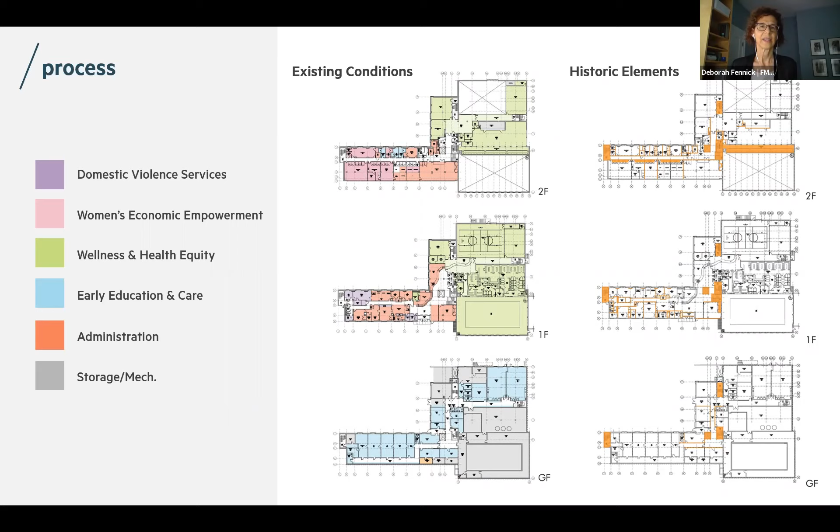So we developed several optional ways of organizing the facilities. Option 2A was the winner, where some of the key elements of this renovation in terms of layout were upgrading the early education facility, bringing it up to current standards. Also, one of the more significant moves within the building, expanding the domestic violence services so they could serve the whole region.

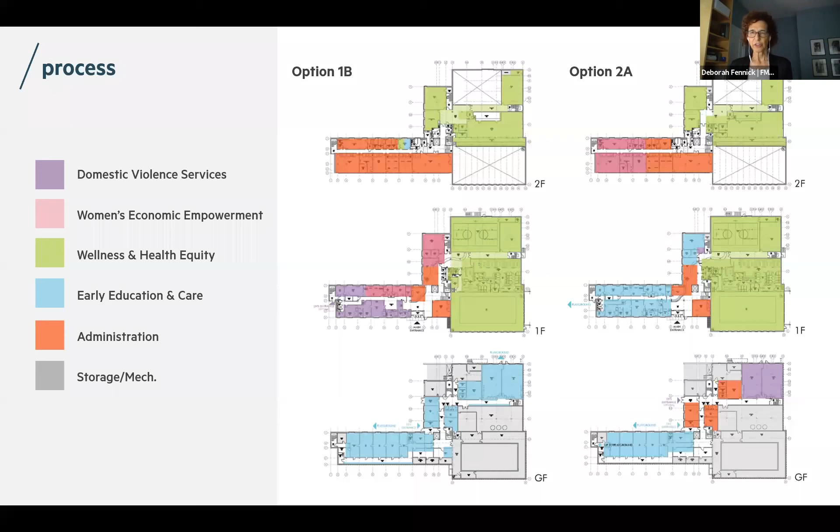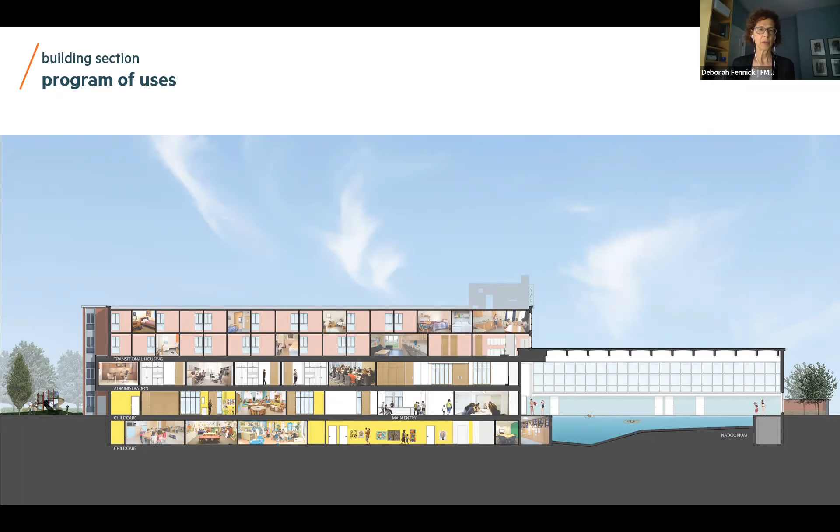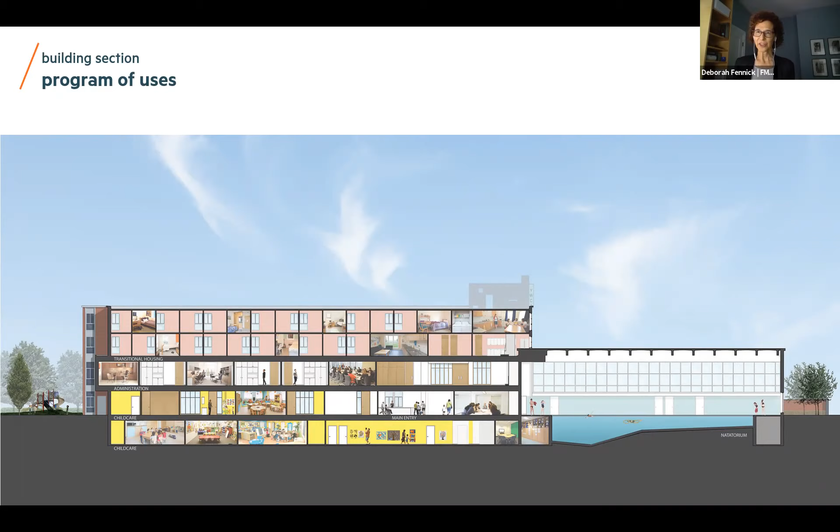And then just a general reorganization of the building to better serve their departments. Next slide. There's a diagram of the organization of the program in section with the housing, the transitional housing, the upper two levels. The middle level, which is brown here, is the administration, and then childcare in the front wing is on the first floor, and the ground floor has the athletic facilities, the pool caught in this section also.

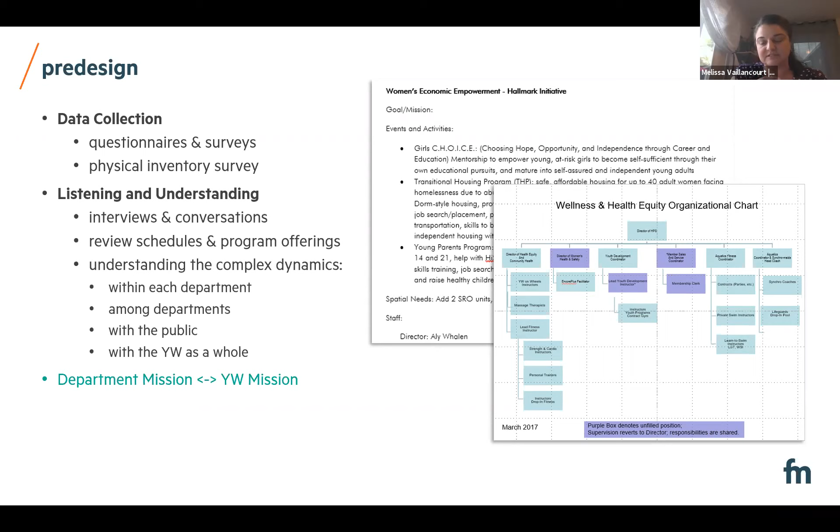So I'm going to go to the next slide and talk a little bit about the challenge that brings. There's a limited budget, there's limited square footage. We weren't adding on to this building at all. And there are a lot of requests and a lot of desires and a lot of dreams. So fortunately, we were able to look back at what Deborah mentioned, that strategy screen document, and use it as prioritization criteria.

So we could start to vet different requests and help the YW make some of these decisions that are really sometimes uncomfortable to make, because you may have demands from one department that might mean something gets sacrificed somewhere else. But together, I think we created this robust toolkit, whether it was data collection tools, understanding the weight of certain requirements, the necessity of certain requirements, or whether things were maybe just nice to have. So through this process, I think we actually created tools with the YW to help track and also help understand and make decisions.

Let's see, I'm going to go to the next slide. Another client of sorts worth mentioning is we had to answer to a lot of grant and funding sources as well. So although we had the YW as our primary client, the project came together because of this amazing network of funds and grants. And the folks over at Pinck & Company, the OPM, really led an amazing effort in pulling a lot of these grants together into the forefront.

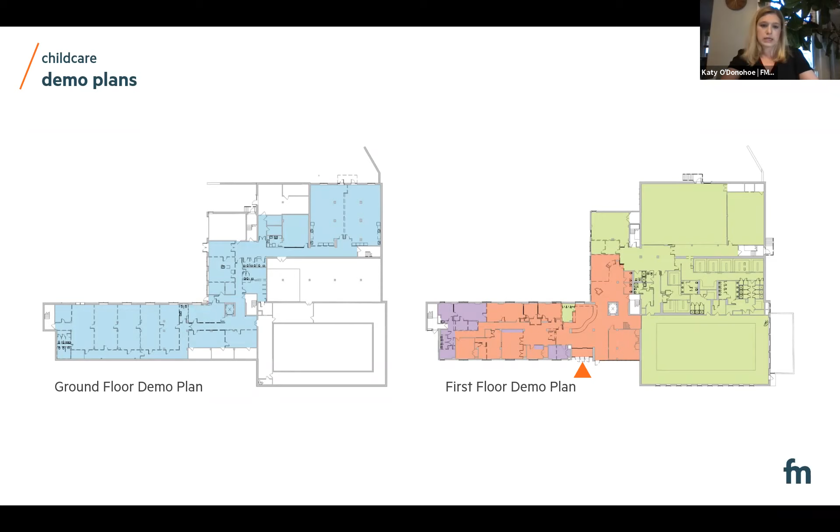One of the biggest changes programmatically throughout the building was shifting the childcare to two floors rather than one. It's organized so that the infant and toddler spaces are on the first floor just off the lobby, providing some supervision from the front desk.

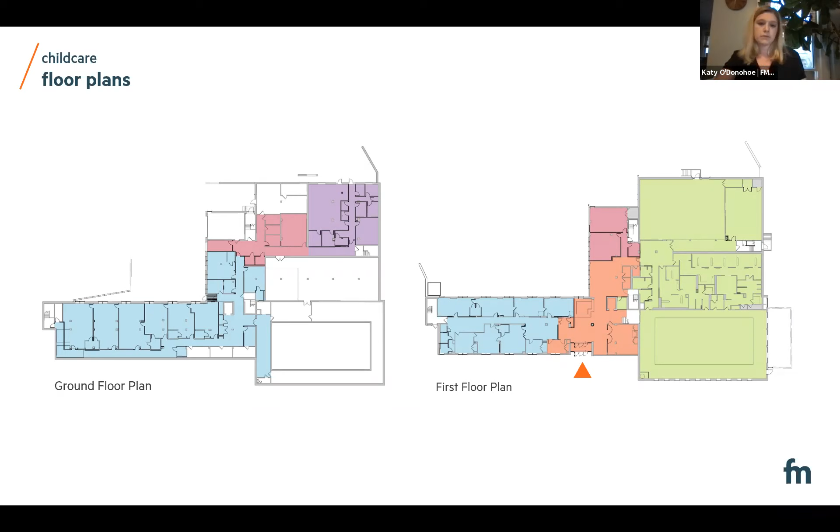The EEOST brought a lot of challenges and programmatic needs. The biggest one out of anything was actually plumbing.

One of the deal breakers in order to be a good contender for the grant was to have four sinks per classroom. That's two for children: one activity sink for crafts or hand washing, and one toileting sink associated with the bathroom. And then two for staff: an activity or food prep sink and a diapering sink, which have to be located physically separate from each other.

Of course, we had to have one per classroom that was also accessible, which took up a lot of square footage, and we had very limited real estate to deal with. It was a lot - a small amount of space to try and fit in a lot of fixtures and associated casework.

Our solution, particularly for the preschool and toddler spaces, was a Jack and Jill configuration. Based on occupancy for preschoolers, there are 10 to 20 kids per class, so we had two shared toilets between the classrooms that were accessible from both. In the kindergarten or pre-K, we were able to do one accessible toilet in the corner of each room, but they have these four-foot high walls, so there's always supervision.

In the shared toilets between the classrooms, we provided glass between the diapering area and the toilet itself to create some separation, though they are quite open otherwise. For the activity sinks, we did a trough sink that becomes a bit of a play feature for kids instead of typical sinks, as well as some casework for staff.

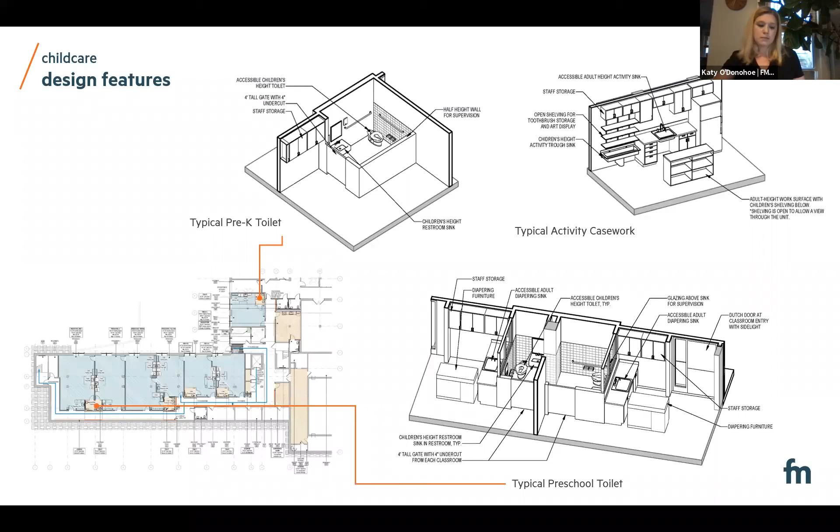For the playground, one of the biggest benefits of splitting them up on two floors was the ability to access the playgrounds directly from their classrooms.

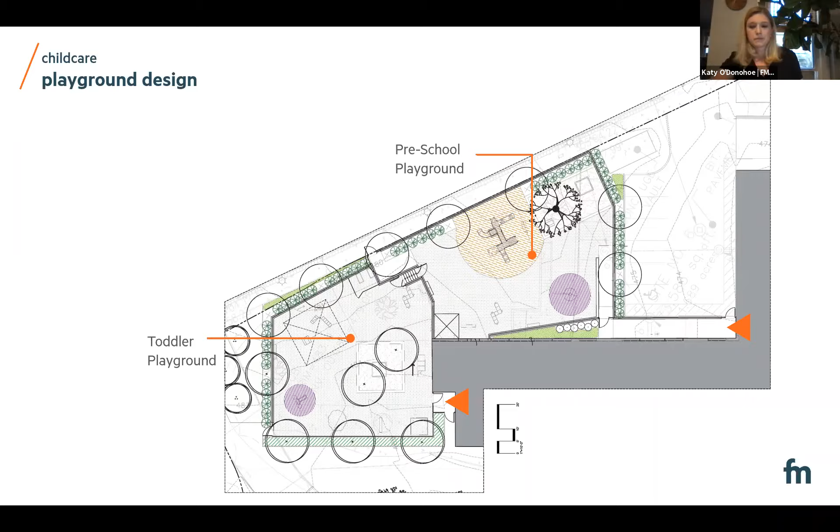Okay, so as we were going through design, two major things happened. The first is we were doing the programming and design and exploring the opportunities of redesign, constantly measuring these things against their strategic screen, the value to the organization and what they were trying to accomplish. The project went from essentially an upgrade of the 1961 building that had some renovations in the 80s, but just very strategic ones, to really rethinking the organization of the building. As Katy described, what happened to the childcare area was one of the more dramatic rethinkings of it.

And with that, the cost grew again. As things became priorities to the YW, they increased the budget. So it grew from like a $12 million to a $16 million project. They became a little more bullish about the capital campaign and their ability to make this work. So that was the first major thing that was happening through the design process.

The second is, again, their costs were based on non-union open shop trades participating in the project. Over time, they realized how important the unions were to enabling more diverse exposure to diverse groups, to minorities and to women, bringing them into the trades. So they wanted to pursue with this project, and pursue their CM procurement, with a union-aligned CM. That increased the budget from 16 million to 19, 20 million.

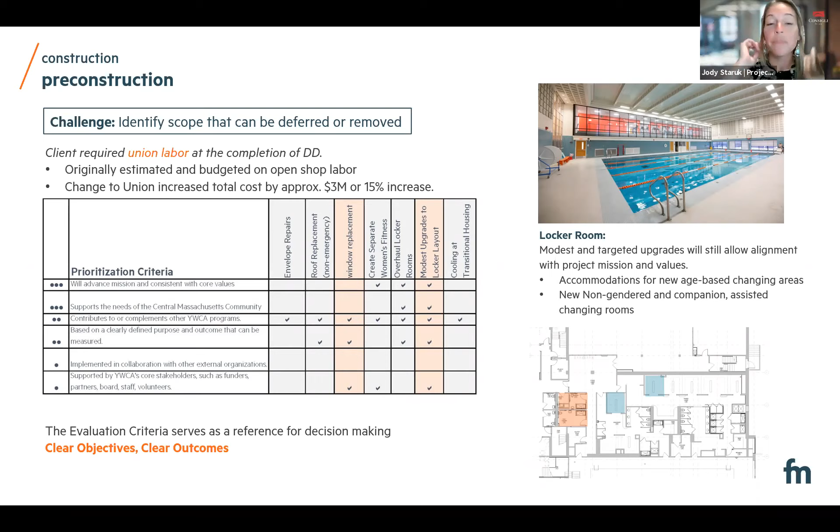And, you know, we bought those signs, the women working sign. I made sure I bought one so that I could have it in my garage, because everybody had that sense of pride, an opportunity in what this job was and what it represented for not only ourselves, but also the client. And we were really thrilled to be a part of it.

So with that, I want to make sure to turn it over to Janice and Andrea to give a few thoughts about living through the project in the field in the middle of the pandemic.

Thanks, Jody. I just wanted to really highlight the fact that as a women-led project team, construction management, and everything going on in the field at the time, we came in with a very unique perspective, being wives and mothers, sisters, that we could take into account the mission of the YW and the needs of the programming, particularly the childcare, in order to schedule the construction activities and the logistics of everything that had to be done to complete the project on time, and still manage to keep the client happy, make sure their programming needs were met, and essentially childcare really didn't get affected so much by the construction.

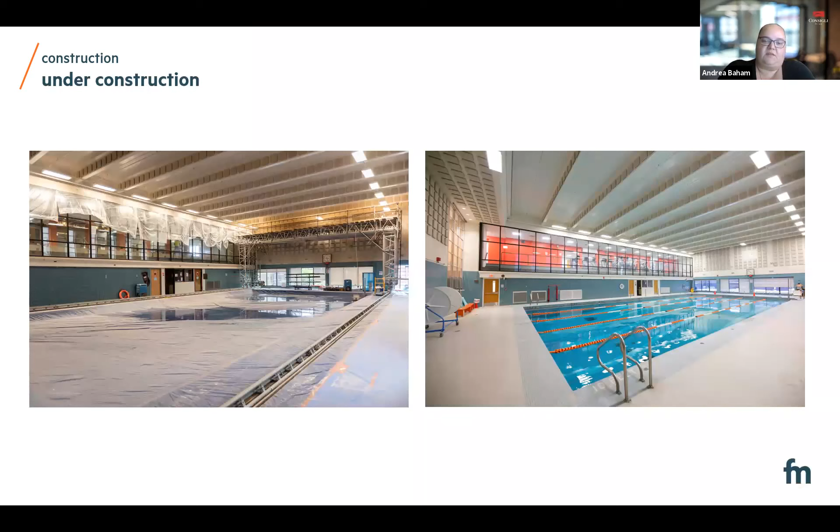So with construction in mind, we're going to hand it over to Janice. She really was the lead on the logistics planning in the field.

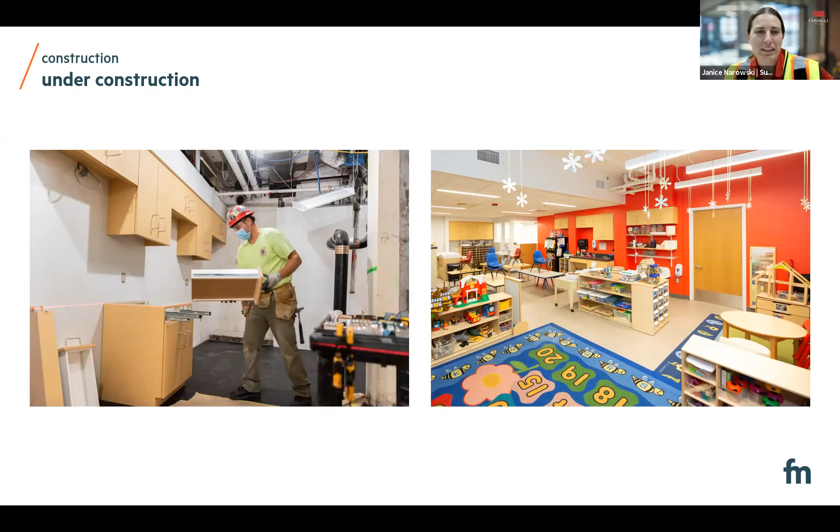I'm just going to tie together a couple thoughts that have already been mentioned here. Lots of different phasing, lots of different systems. It started from the beginning, all these different areas. During the pre-construction, when we were reevaluating the design, reevaluating how things were going to tie together, we did a huge HVAC overhaul with the entire team, FMA and all their consultants, and broke down the HVAC to fit kind of the phasing we worked out with the YW. So everyone worked together to kind of redesign things that were going to limit the impact later on. We're going to allow us to better finish the spaces in totality and not have to go back and be in occupied spaces, making connections and making fittings. So it was a full team approach right from the start.

And then right as we went through, as we were doing inspections for all these different zones, we were able to have systems that had been thought about ahead of time and could be tied in, turned over all together. Existing conditions were rough. As Andrea was just saying, we were working all these different departments. Deborah highlighted childcare, the gym, the fitness center, the women living upstairs. We had to do shutdowns. You couldn't turn off water when they wanted to shower. You couldn't lose the hand wash sinks during the pandemic. We were trying to time it so lighting would go out when the kids were taking a nap. There were lots of things that were very interactive and very different about this project that kept us all going and kept us on our toes.

But the open communication, that was my biggest and favorite takeaway of the project, coming in with the all-female construction team, all-female design team, other than a couple consultants, but the owner's team, OPM, like there was a general baseline of trust that went in right at the beginning.

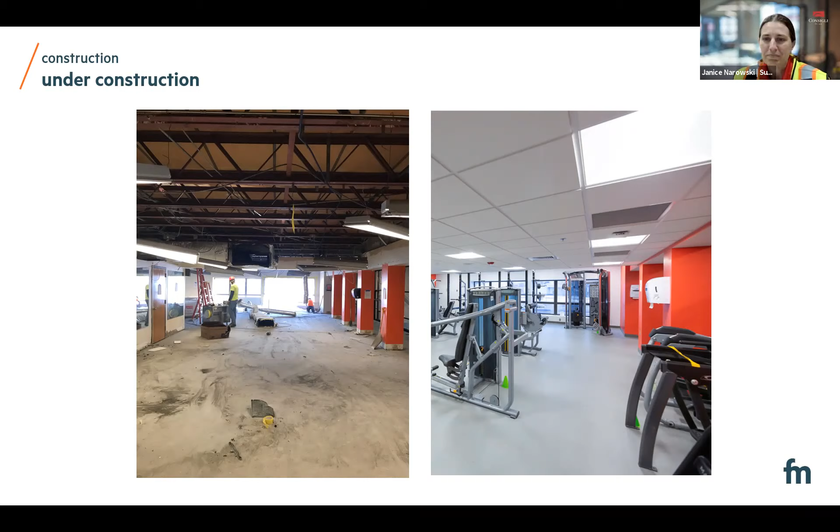And now we're going to show you the final product. You've seen a lot of sketches and diagrams and charts, and here's the finished product, with some existing or formerly existing conditions, and historic photographs or sketches.

So the front of the building right now, actually the site work for the front of the building, which got its funding a little bit late, is being constructed a little bit late and is happening right now, so we'll have better images to show the front. But the major element that happened, there was some repair, facade repair, but window replacement was pretty impactful change on the building, both in its performance and aesthetics.

We used the historic photographs of the building as a guide and replicated the mullion patterns, but with those revised mullion patterns we had different functionality to the windows. We needed greater ventilation in the transitional housing units and things like that. So that was a big challenge to bring it back.